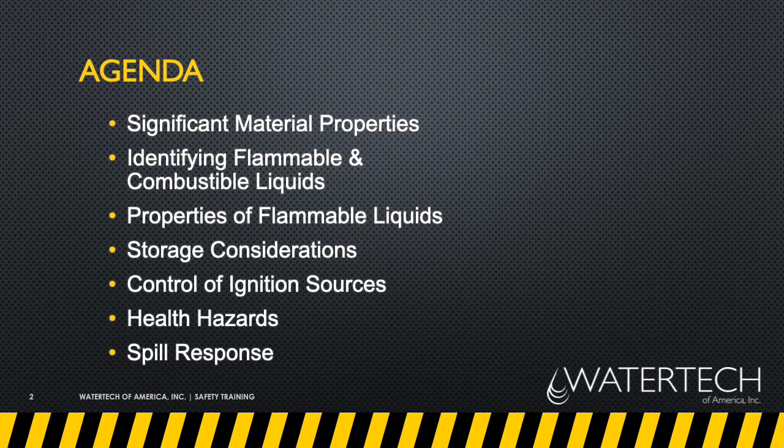Open spill, kind of the same thing we talked about before. You know you can put a match out in gasoline, right? Just better make sure that gasoline isn't giving off enough vapor to support combustion, because if it is, you're going to blow yourself up first, right? So, got to consider the behavior of the vapors.

Is there going to be enough? That's our lower explosive limit. That's the concentration at which there isn't enough vapor in the air to support combustion. It's too lean, right? And then we get to our upper explosive limit. That's where it's too much, it's too rich, too much fuel just to keep it going. In that area in between, that's the flammable zone - the area where there's enough concentration of gases and vapors in the air to keep combustion going.

So when we talk about flammables, that's our job: don't get that concentration in that combustion range. Either have it be too weak or too rich, so that you can't, or don't have any in the air to begin with.

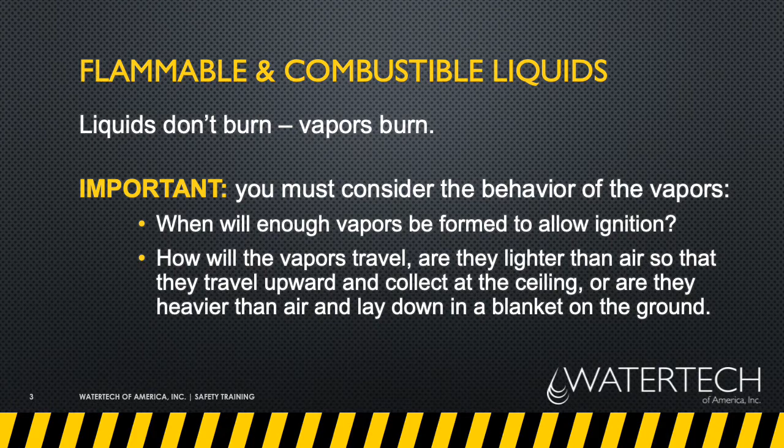So what do we know? Well, the larger the surface area, the more vapors are going to be generated. You know, it's amazing - you spill a 5-gallon container, it looks like a tank truck. It's huge, right? It's a little 5-gallon pail, and you look at the area on the floor. So it doesn't take a big spill to get a big volume of surface area that is exposed, and if it's flammable, the greater the surface area, the more the evaporation, the more likely you're going to have that vapor be in that ignitable range.

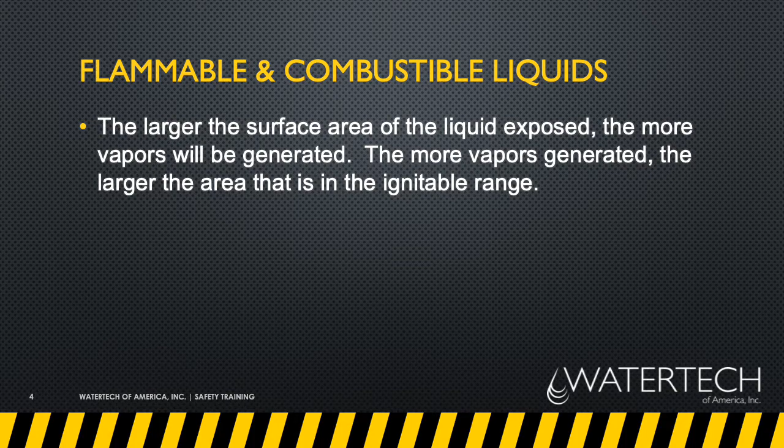So we talk about it - fire, what do we need? Source of ignition, some oxygen, and some fuel, right? So we talk about the fire triangle. We talked a little bit before about chemicals, that hey, you can have friction, you can have other things that cause a chemical reaction to start a fire. But what's the key? If you don't have one of the four, you won't have a fire. So you get rid of the oxygen, you get rid of the heat, you get rid of the fuel - one of those things, you're going to have the fire go out.

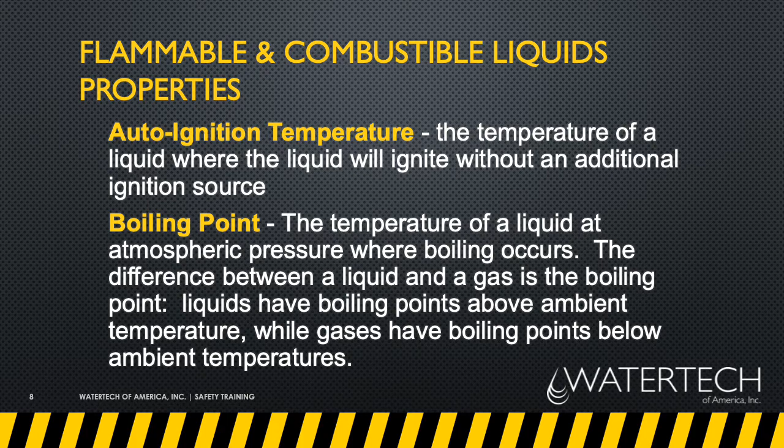So what are significant material properties? Well, here's some of the things we talk about: this auto ignition temperature, which is a temperature where the liquid is going to ignite without an additional ignition source. I can't even think with any of our products what that would be. Boiling point - obviously we know what a boiling point is, the temperature at which something boils.

Flash point, that's an important one, so that's temperature related, right? And so when we talk about flammability inside a customer's facility, or what temperature is this stuff going to be at, right? Because the warmer - depending on where this flash point is - as you get closer to that, it's going to be giving off more and more and more vapor. And the flash point is the temperature at which there's enough vapor given off continuously so that it can support combustion.

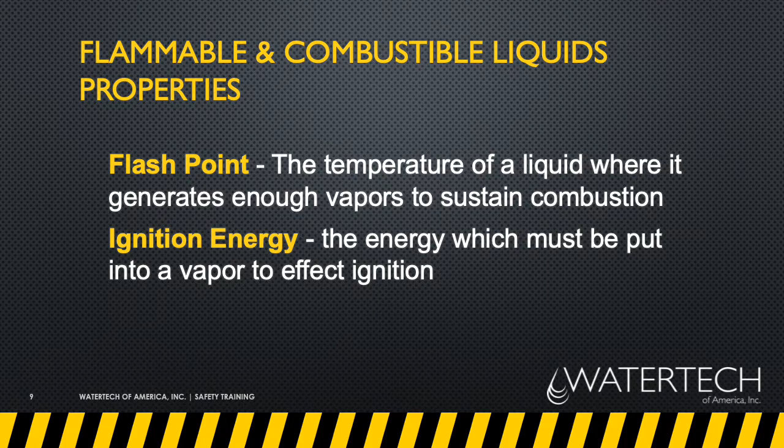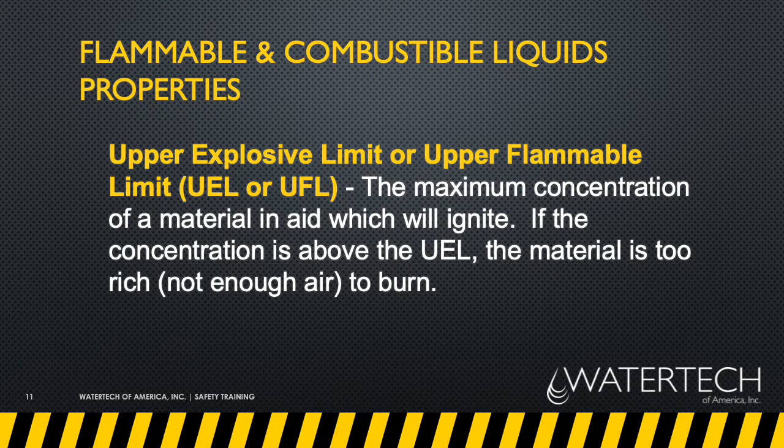Ignition energy - again, I'm not sure where that one all comes in. That's the energy that you have to put into a vapor to get it to actually start. Here's where I mentioned this before, this minimum concentration which will ignite. So if you get below the lower explosive limit, there's not enough fuel. And we have the upper limit where, hey, there's too much, it's too rich. And so we want to try to stay out of this range right here, because this is the range at which there's enough vapor to keep that thing going and keep the fire going.

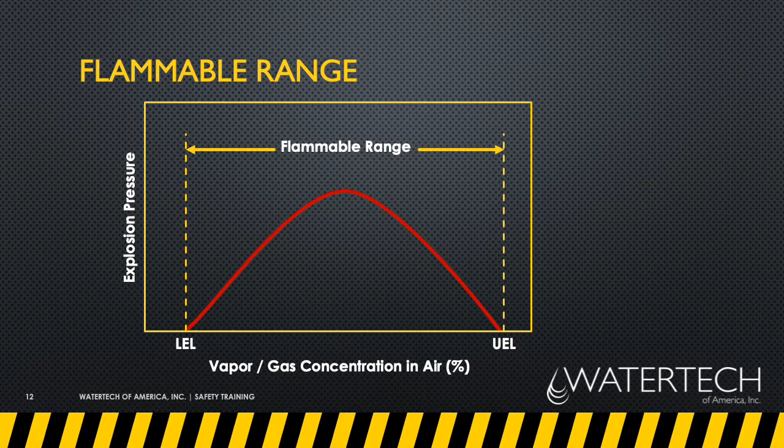In a lot of cases in our boiler rooms, we're talking about our steam line treatments primarily, and realistically you have DOT and OSHA, related to flammability and flash points. Most of our boiler rooms have amazing ventilation, right? You got all the air for combustion to burn the gas and the fuel. So in most cases, with the concentration of products we have in a space, I can't see where it would ever get to a point where we'd have to worry about an explosion. But again, same thing, don't put your steam line treatment right next to the hot water heater. Just use good common sense.

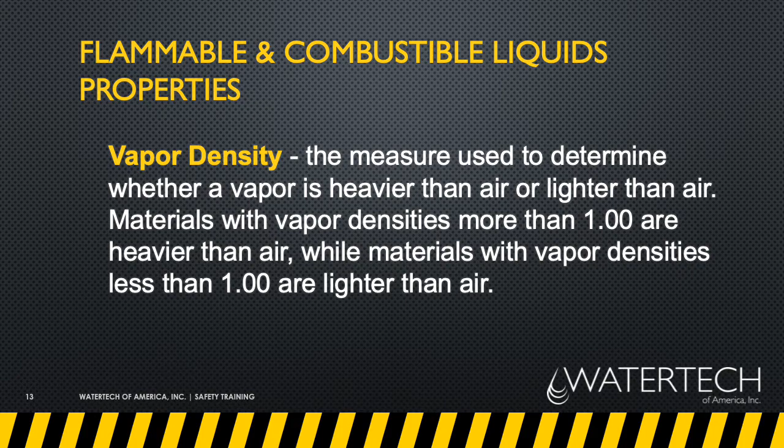So how do we identify flammable and combustible liquids? DOT and EPA are all related to this flash point. What's that temperature of the liquid where it's going to be giving off enough vapor to support combustion? EPA says if the product has a flash point of 140 or less, it's considered flammable. So if it supports combustion at 150 degrees, it's not considered flammable. But this is only for transportation, right? This is to get the stuff there.

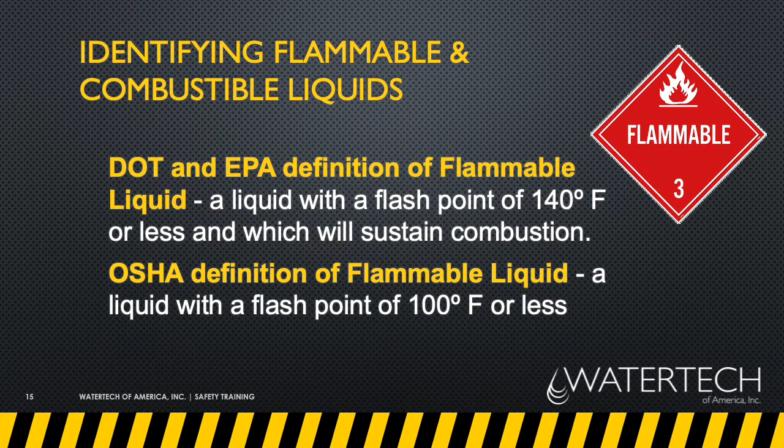So a combustible liquid, EPA doesn't regulate or recognize it. OSHA says there's different classifications. So a class 2 is a flash point between 100 and 140. Class 3 is 140 to 200. Combustible liquid, again, that's heated to within 10 degrees should be treated as a flammable liquid.

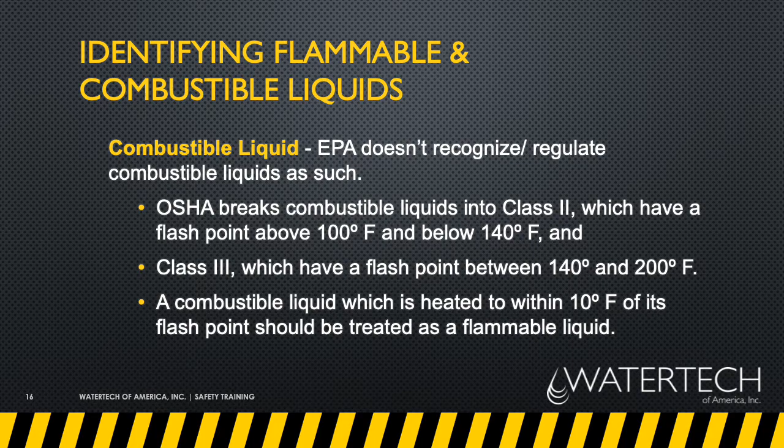Same thing with us - some of our boiler rooms can get pretty hot in the summertime. Hopefully they're not too much more than 100 and 120 degrees, although I know some can get pretty hot. But again, it's OSHA that we're worried about. These guys are DOT, and that's more primarily from the placarding on the truck and the bill of lading. Make sure all that paperwork, should they get pulled over, that their documentation reflects what the DOT considers to be a flammable product. Isn't that amazing? The DOT and OSHA and EPA, they don't all work together. It's crazy.

DOT says all containers must be labeled. So you got a red label, you'll see the little red diamond on there. And they say it's got to be 119 gallons or greater. Is that total? So if you have 2 drums, are you 3 drums, or is that the container itself? So as it says, this can be deceptive, because when it's in the warehouse, OSHA regulations apply, not DOT.

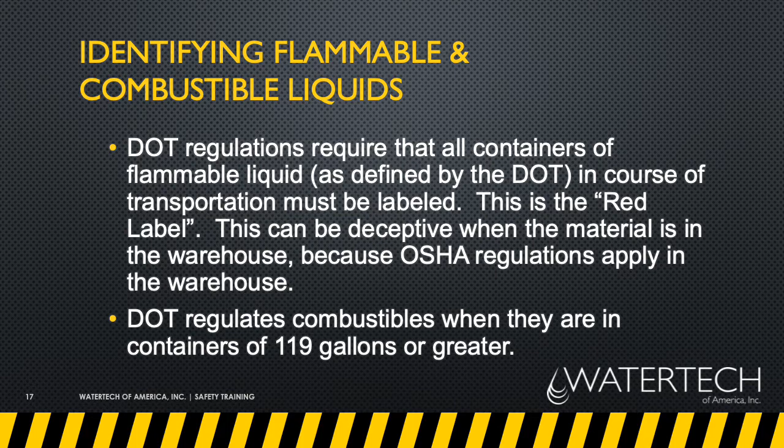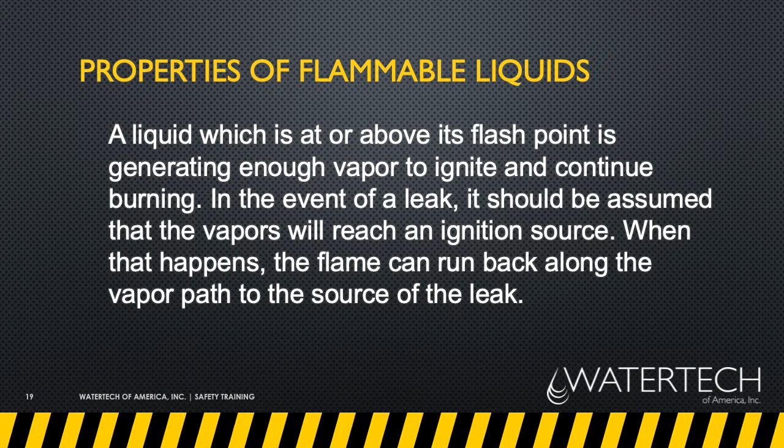So what about some of the properties? A liquid which is at or above its flash point is going to be generating enough vapor to ignite and continue burning. If there's a leak, it should be assumed that the vapors are going to reach an ignition source, and then it runs back along that vapor path to the container.

That's what we're saying - hey, trying to set up drums next to hot water heaters. And oh well, it's right next to the boiler. Right, and the boiler's a big flame. Well, don't put the chemical right in front of the burner. So the lower the flash point, the more flammable vapors are generated, so obviously the more vapor, the bigger that vapor cloud's going to be, and that can cause problems.

Again, I said in a boiler room we have such good ventilation typically that I don't see that as a big problem. And as the vapor cloud expands, it's kind of interesting how that works - it's really concentrated, it expands, and as it expands it starts to get less and less, going from really rich, being in that combustible zone, to now it's too lean. There's not enough fuel to support the combustion.

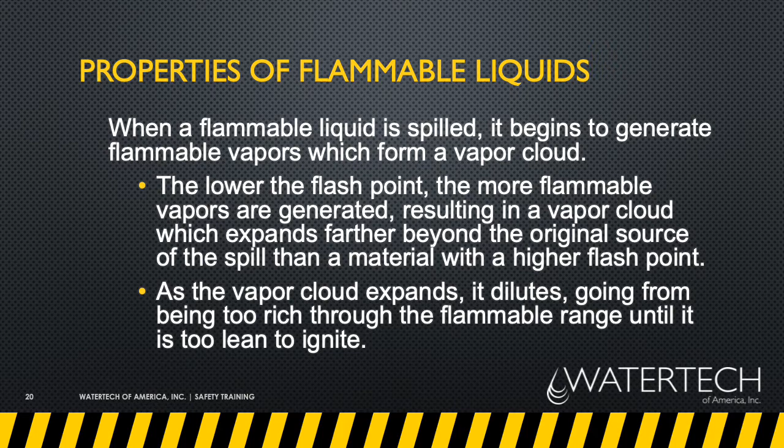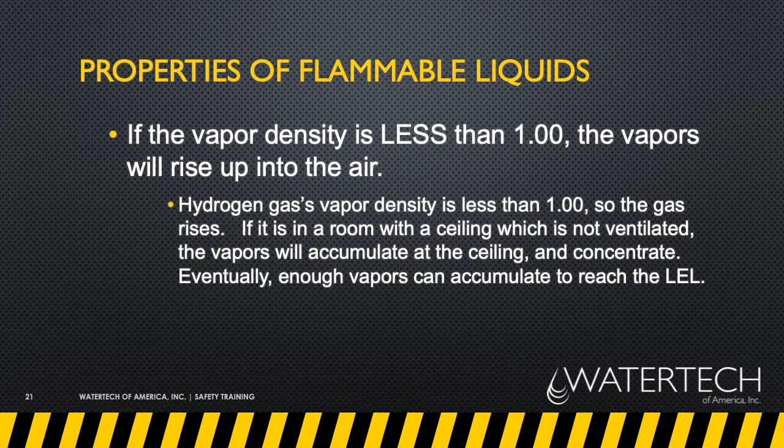I can't think of anything we'd be dealing with where we'd have to be aware of that.

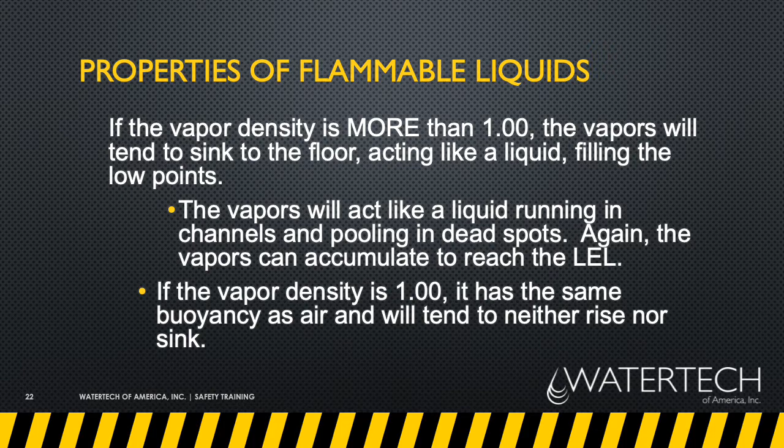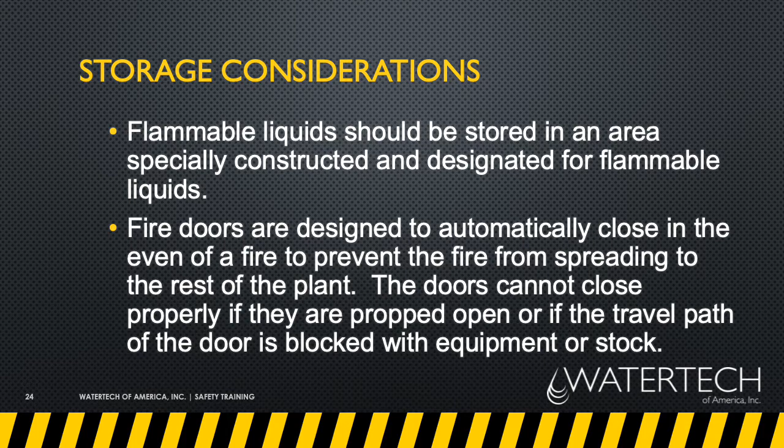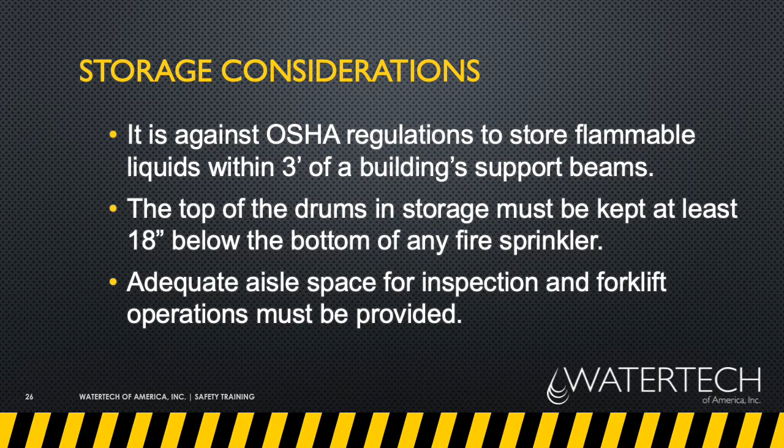It says don't store flammables within 3 feet of a building's support beams. Top of the drums in storage must be kept at least 18 inches below a fire sprinkler. Where's that going to be important? Hydrite, right? You've got pallets up to the ceiling with stuff. That probably isn't going to be enough for us - keep an eye on this one, the 3 feet. And then adequate aisle space, if possible. But again, that really doesn't pertain to us all that often.

How about controlling sources of ignition? Don't have it near open flames, hot work, tools and equipment, hand-operated tools. Let's talk about static discharge.

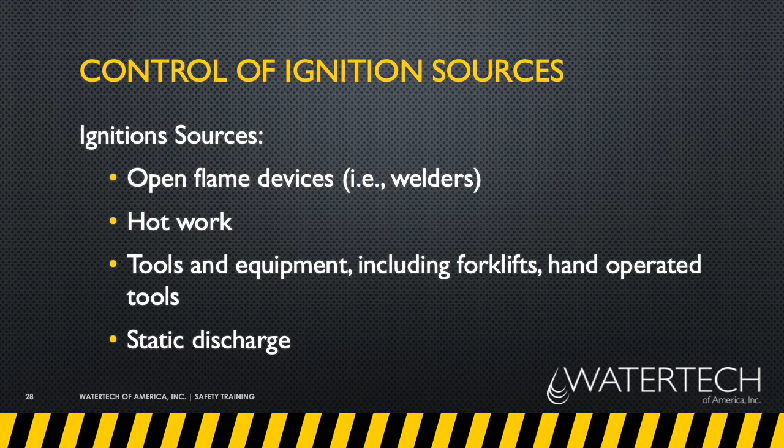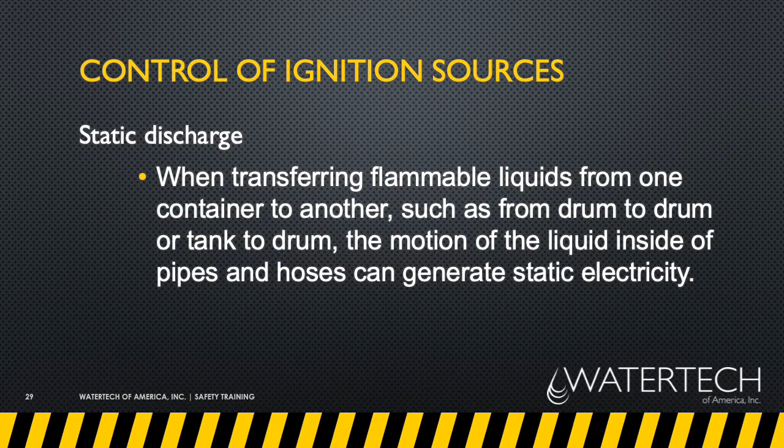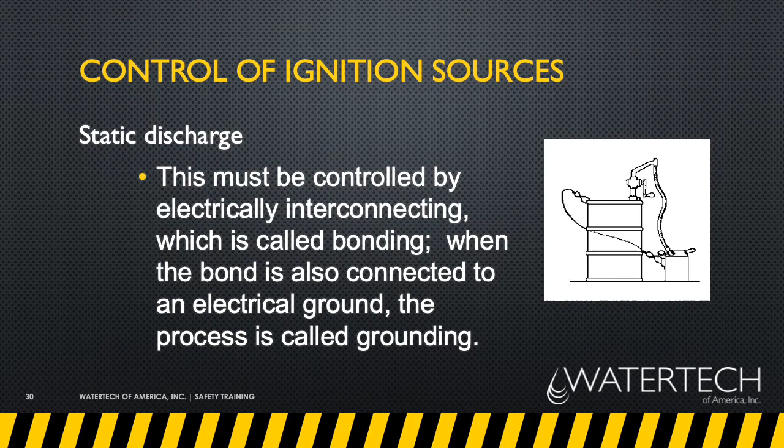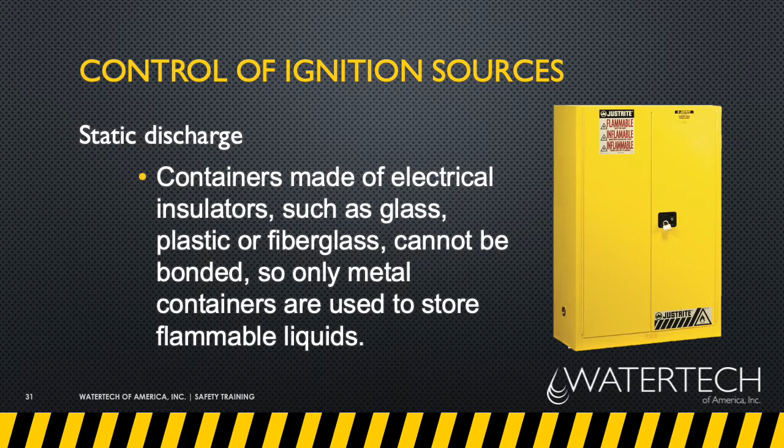Spontaneous combustion - in general, I don't care what it is we're dealing with. If you clean up something with a rag, rinse it out. Make sure there's no residue in the rag before you dispose of it. Don't just rinse out the rags and toss them into a garbage. You're asking for trouble. There may not be any problems at all, but let's not take that chance.

And if it is flammable, you guys have seen them - our customers have them. Rags get solvents and other things on them, and they have those little red fire cans, almost like small garbage cans, that they put stuff in. When those are full, they have somebody come and specifically haul away the flammable stuff.

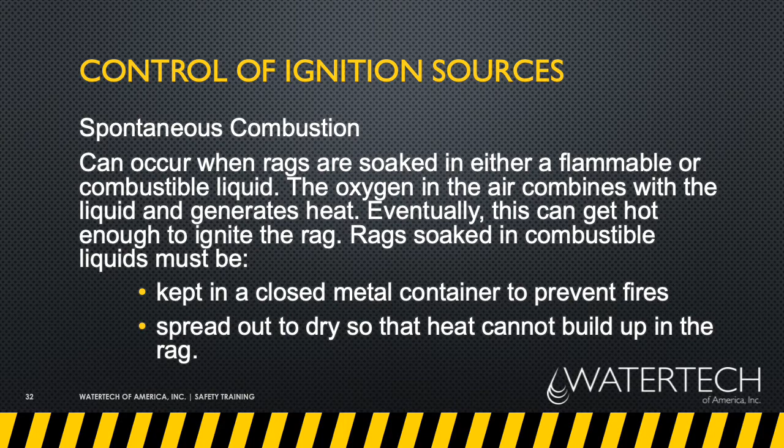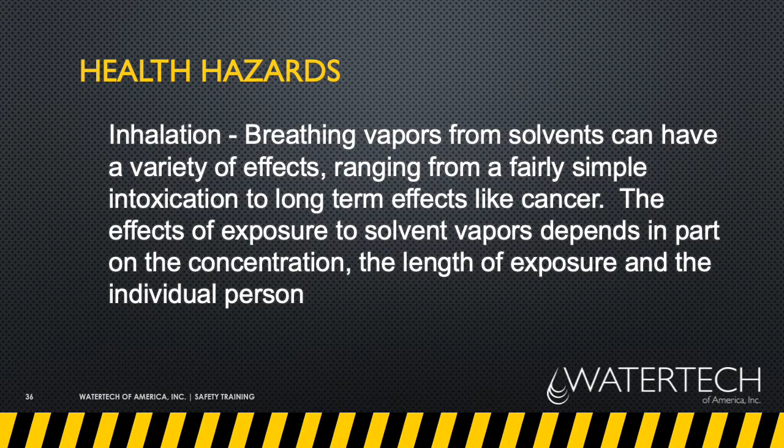Inhalation, obviously, can be pretty simple - just taking your breath away. None of us should ever have to worry about the long-term effects because we're not working around them 8 hours a day, breathing the stuff in day after day. So long-term effects - even you guys delivering them aren't doing enough of that. But in general, what I always say is just try to make sure there's adequate ventilation. Engineering controls are the best way to prevent any problems.

What are some of the acute effects? Well, with short-term exposure, you might get a little dizzy, you might get a little drowsy. I hope you don't become unconscious.

If you have exposure - this is more talking about solvents, right, not our steam line treatments. These are more talking about solvents that we're going to see, industrial solvents and cleaners in our facilities. I can't remember, what's the name of the stuff you put on walls? Kilz or something like that.

It gives off these really toxic fumes. My buddies used to be home remodelers, they're like, 'yeah man, we get so stoned off of this Kilz.' I'm like, what are you guys doing? Open the windows, you dorks. And then you looked at them and thought, no wonder.

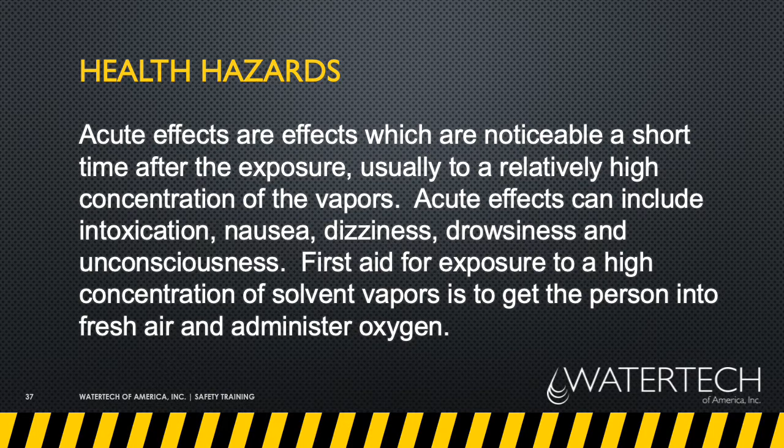What are some of the chronic effects? Again, we really shouldn't have to worry about it because we're not around it, but obviously if you get exposed to solvents and some of those things, there's definitely some really serious side effects. If you notice me with insomnia or mood swings, maybe that's the reason.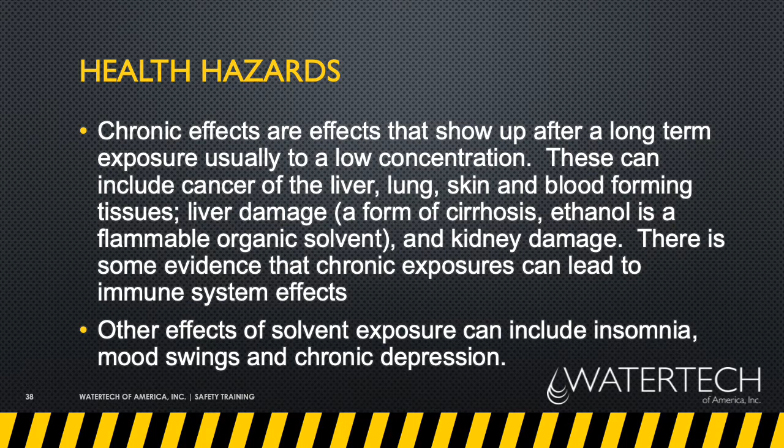Skin contact, obviously that's the most common thing, but you're not going to get a burn. It's going to be more like a rash, dermatitis, make your skin real dry. That's the result of the ability to dissolve fats and oils, and it's going to make it more vulnerable to infection.

What's the best thing to do? Just wear your PPE. We have all the stuff you guys need to not have to worry about getting stuff on your body, your clothes, your person.

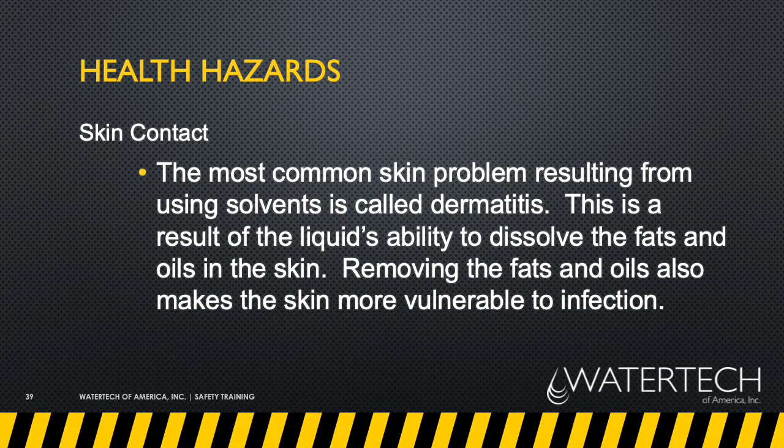Organic liquids in the eyes - it's going to cause some pain, but not anywhere near as potentially damaging. Although, if you get anything in your eyes, rinse them for 15 minutes. And if it's me, I'm going to seek medical attention. I don't care what it is - I only got one set of eyes.

So, same thing for pretty much everything. If you get stuff on you, whether it's on you or in your eyes, 15 minutes of rinsing, and then go seek medical attention.

Spill response. Eliminate all open flames, don't operate any switches, leave the area. Again, ventilation is the key. Turn on those electric fans - oh wait, no, don't turn on the electric fans.

Again, we're dealing with specific types of products - this is specifically the steam line treatments. They don't act like solvents, right? The only reason they're flammable is more from a DOT perspective than from us being in the field. These things aren't giving off tons of vapors in the field - the concentration is low enough. So we're talking here more as this relates to solvent type products.

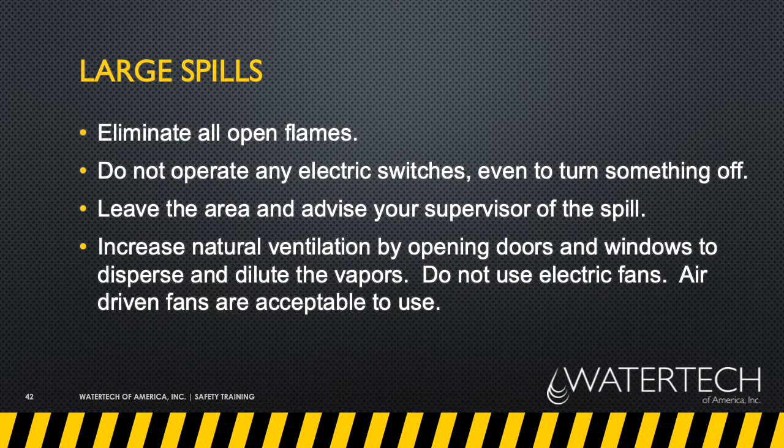But you still have to be clear about using a combustible gas detector - we don't have one of those. That's definitely going to be more about going into a customer's facility or entering an area. We're going to rely on the customer - that's not going to be our area of expertise.

Although, from your own expert knowledge, if they are using some kind of gas detector, whatever it is they're detecting, don't go in until the concentration is below 10% of that lower explosive limit, at a minimum.

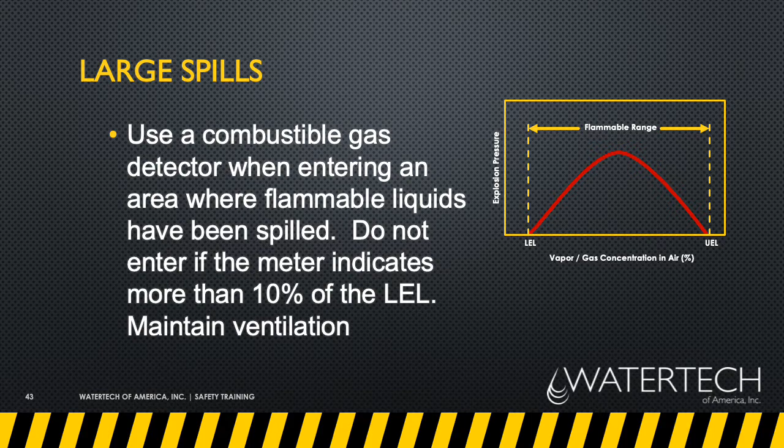When's it safe to enter? When the concentration in the air is measured to determine that you don't need respiratory protection, because guess what - the only guys that are fit tested for respirators are those two yahoos back there, and none of us are permitted to go in any area where you're going to need a respirator.

And then again, if you spill, use these booms or absorbent socks. Check out your spill kit standard operating procedures. And just remember, if it's flammable stuff, you can't just throw it in any garbage - it's got to be thrown in a specific flammably approved container.

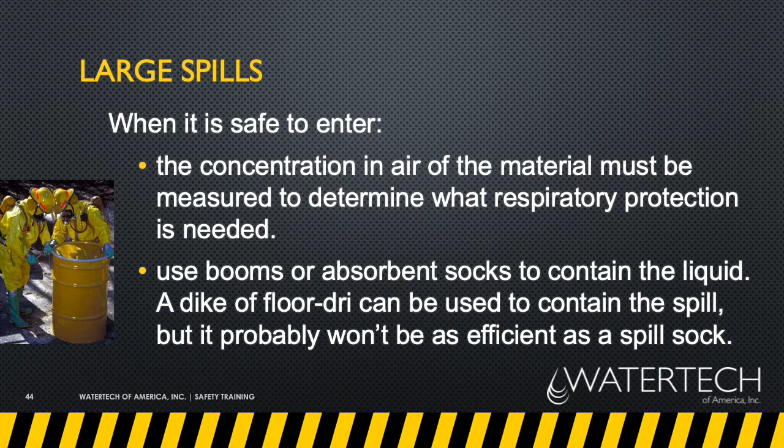And again, common sense. I talk about, hey, that a tote leaked and it was in the containment. Well, what do you do? Pump the stuff from the containment back into the tote, assuming the tote's not still leaking, right? Don't just leave it in the containment.

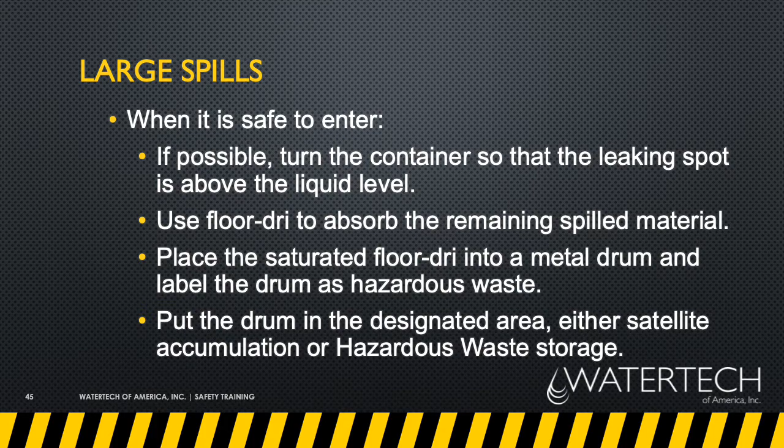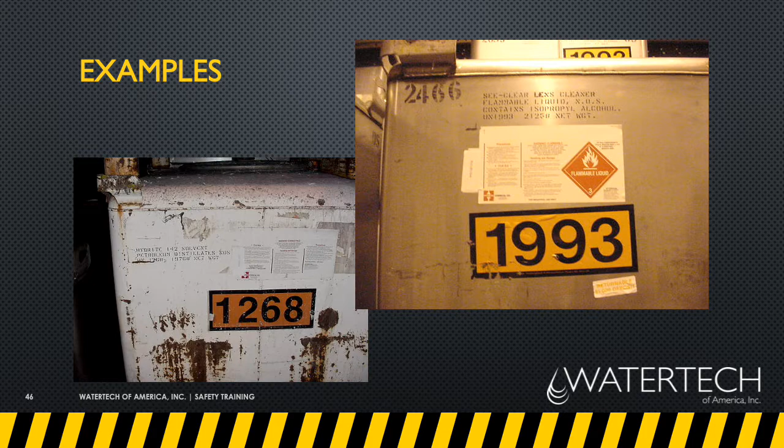And then it's got to be removed properly. Again, there's that little diamond, but again, that's more for DOT than it is for us in the plant.